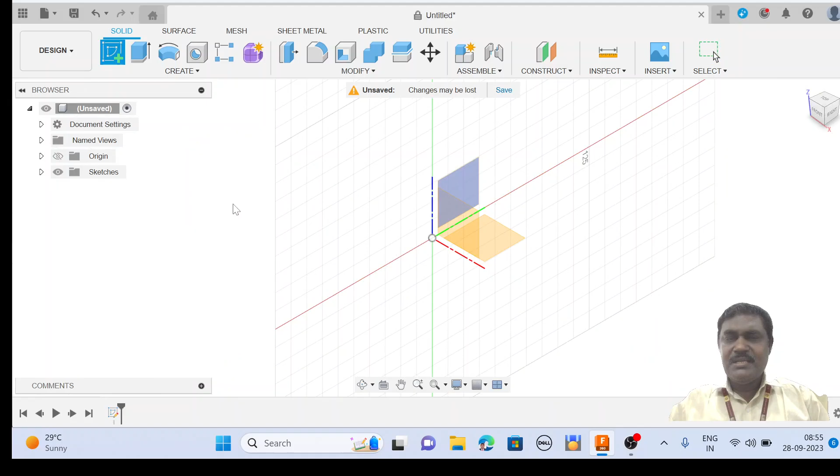Now you can see that this is the sketch plane. Click this one. Once clicked here, three reference planes are visible. You can select any one reference plane. Now I have taken this plane as a reference plane.

Now here there are separate different icons, and you can also control the different activities here, such as the line type, whether it is a construction line or a center line, and look at sketch, grid, snap mode, slice mode, profile mode, points, dimensions, constraints - different options are there. If you want, you can use it, or just click this one and it will go inside.

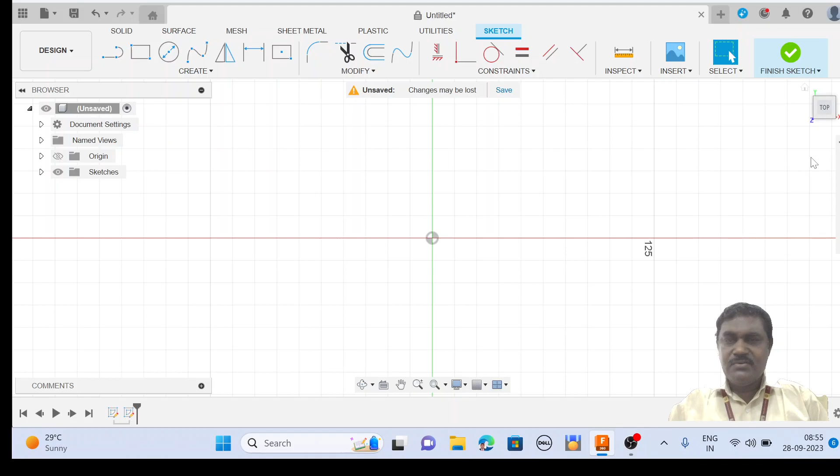Now let us see that. First I want to draw the line, simple. Using this icon you are able to draw lines and arcs continuously. So now click this icon.

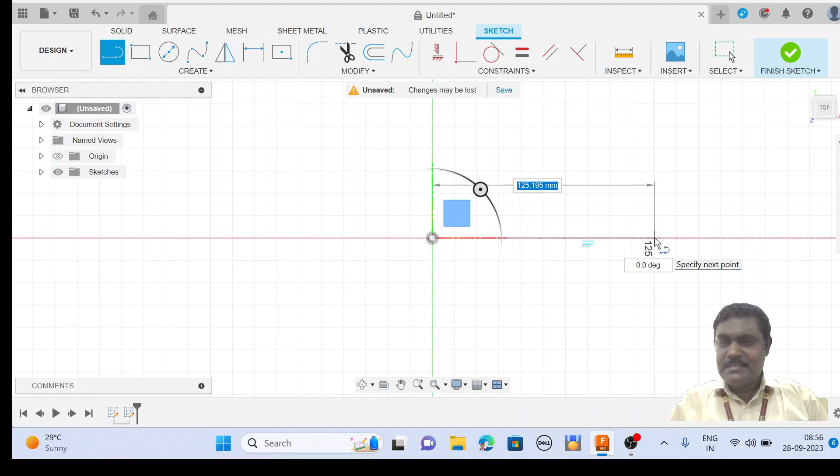Now I want to draw this one line and go to the second point. Now I can click the second point, then see the third point. Here this is continuation lines, it will come like this.

Okay, now next I want to draw the arc. For drawing the arc, just press the mouse and drag, so that the second point will be here, creating the arc. After completion, right click the mouse, then you can click here - different options are there. Now click OK, then the sketch is obtained.

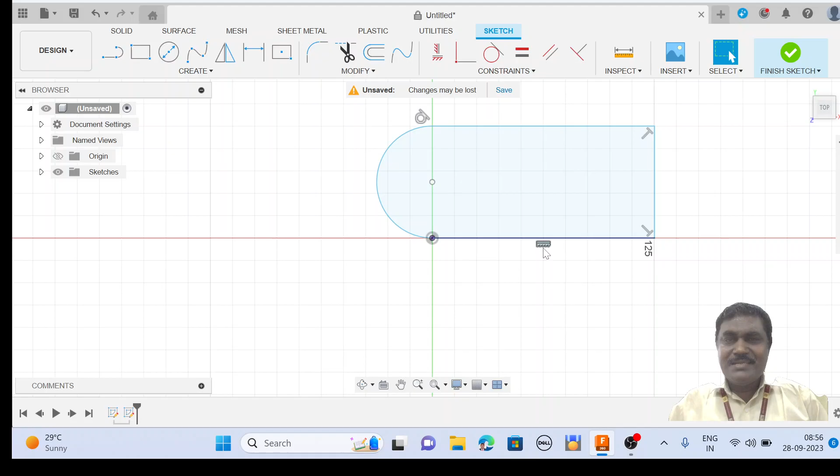So these are the constraints. Now here see that this is the tangent, this is the horizontal constraint, and this is perpendicular. These perpendicular symbols are visible. If you don't want the symbols, just click here, and the constraints are there - you can just uncheck the constraints. All the symbols disappear from the sketch for clearly understanding.

Okay, so this is for using the polyline. You are able to draw the line and arc.

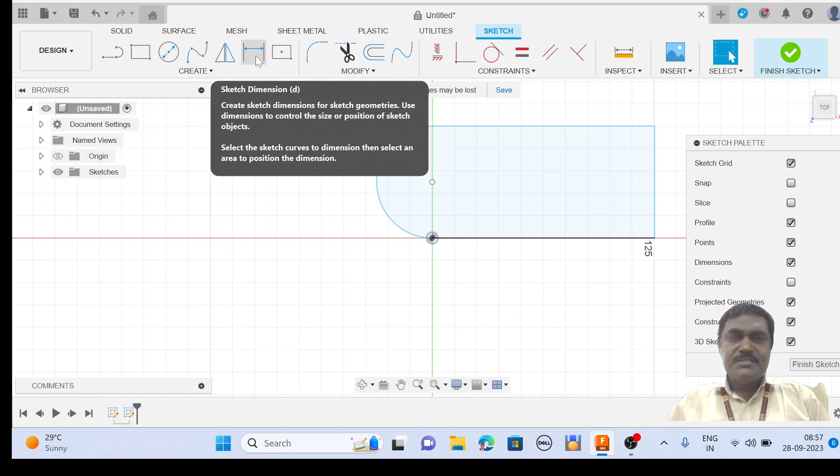Okay, now how to mark the dimensions? Using the sketch dimensions, you can create these drawings. Just select this one and click here, and you can mark the dimension. Suppose 125.19 is there, I want to make it round figure 130. Now you can click 130 and enter, so it will take 130 dimensions.

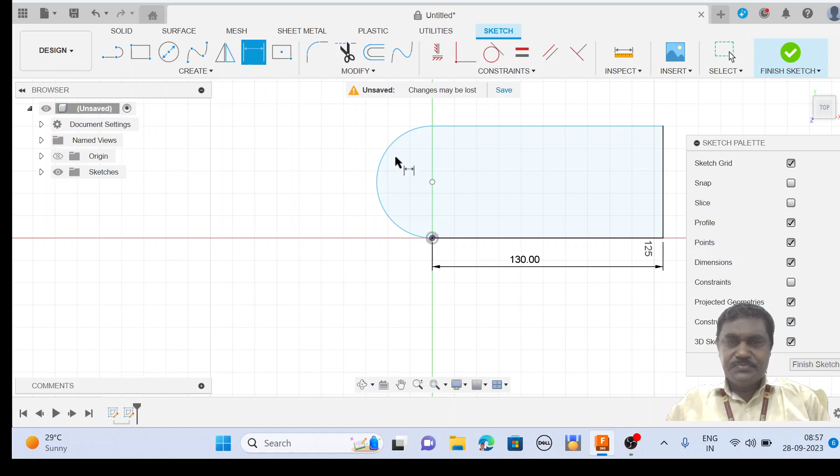Similarly for this arc, if you want, you can see the radius, where you want you can place the radius, and round 31.29 is there. I want to make it 30, then enter. So accordingly it will readjust the dimensions. Likewise you are able to create the dimensions also.

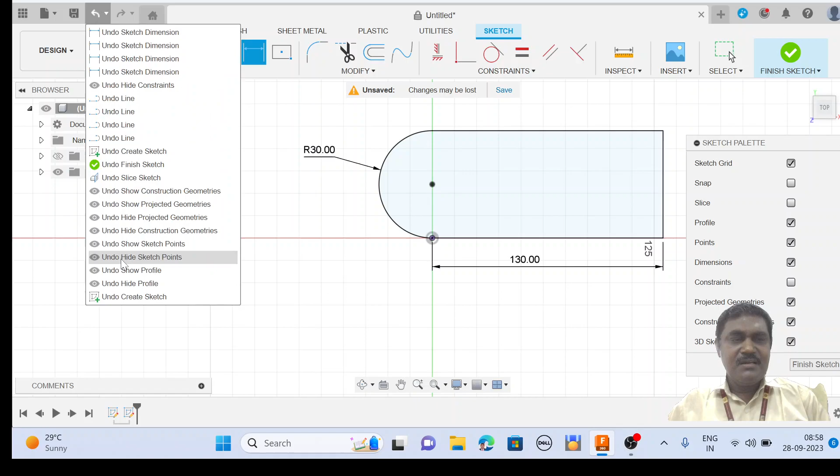Okay, so this is for creating this polyline. Now I want to delete this one. Just go for this undo, sketch dimensions are there, or inside here so many are there, one after the other. What you have to do is click here, or you can click this one after the other, it will be removed, deleted. One by one it will be deleted.

Okay, now again you can enter the sketch mode. Then I want to draw the rectangle - the 2-point rectangle. Create a rectangle using the 2 points for the diagonal corners. Select the first point as the start of the rectangle and select the second point, or specify the width and height values. These options are possible for creating the rectangle.

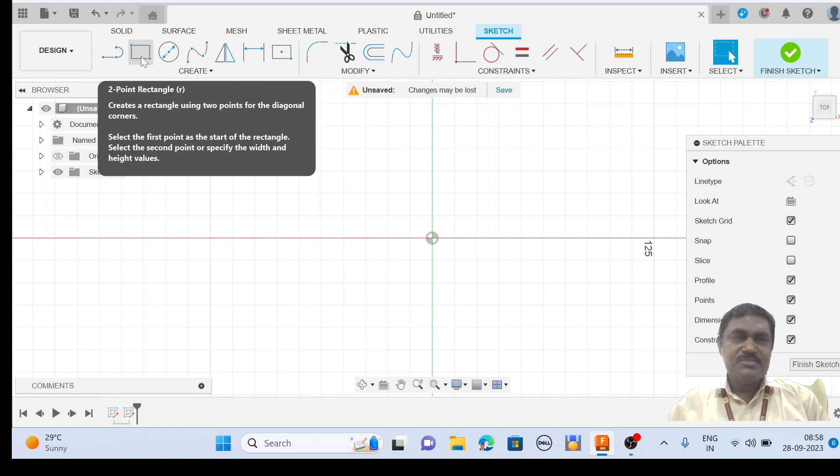Now I click here - this is the starting point. Now you can see the diagonal point. You have to create the other one. Then right click and click OK.

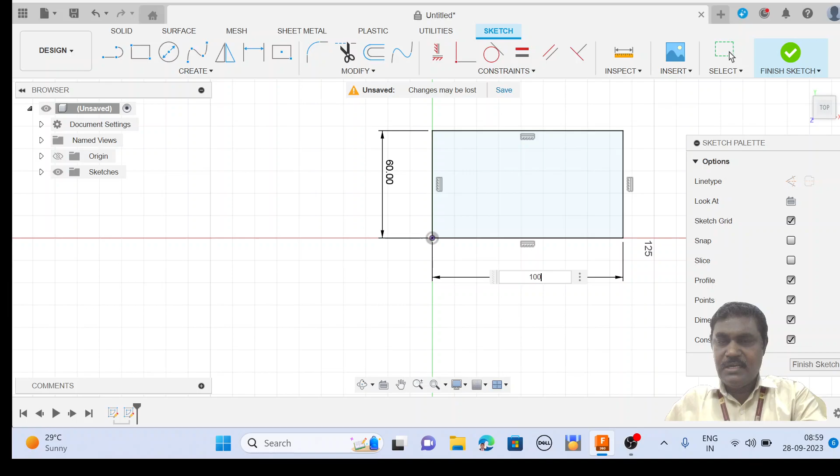Okay, now if you want to change the dimensions, you can change by using this dimension tab. Click the dimensions tab, then select this one, and you can see 58 point is there. Now I round it to 60, then enter, it will move. Similarly for this also, 107 is there, I want only 100, just click and enter, so it will be adjusted. Okay, so this is for the diagonal points.

Here you can see another option, center point rectangle. Click this one. Now this is the center point, and you can extend wherever you want the rectangle. You can create, right click, click OK. So in these two ways you can create rectangles.

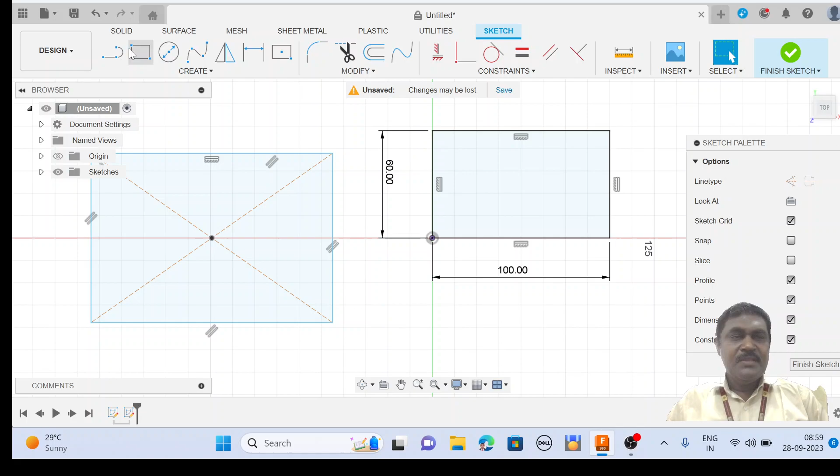Okay, now I want to undo. Just undoing all the activities. Then I will go for another drawing. Now let's select this plane.

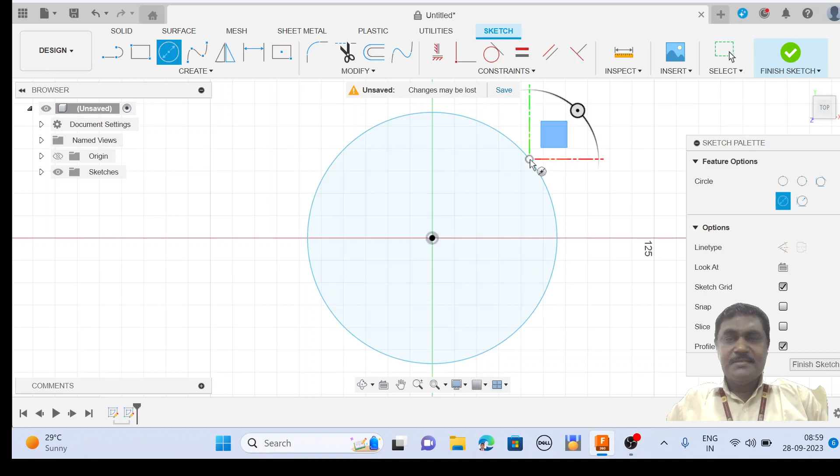Now I want to create the circle. Creating the circle using the center point and diameter, just click the circle. I make this the center point and enter the radius or diameter, right click OK. So this circle will be created.

Okay, similarly now you can create this - this is for the spline. You click this point, and like several points you can select like this to draw the splines, then right click and click OK. That will be over, so now you are able to control this curve.

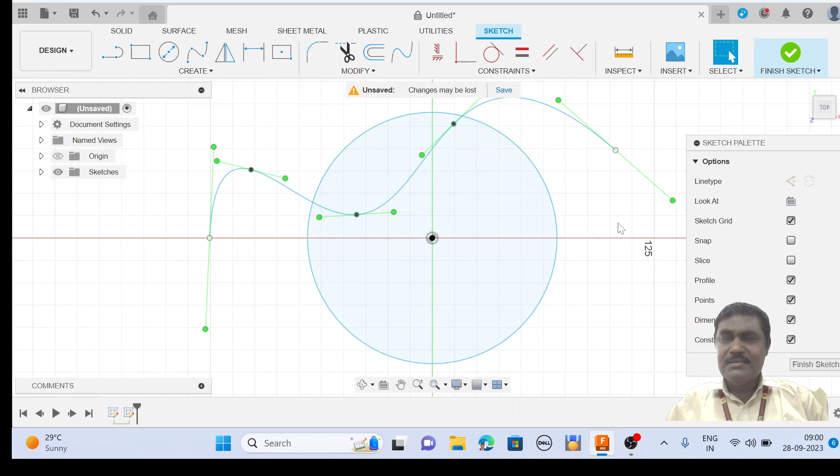You can see that here this line you can move according to the required shape. You can move this tangent line and readjust the shape. Now you can see you can move like this to readjust the shape - that possibility is there. Okay, next coming to the mirror line.

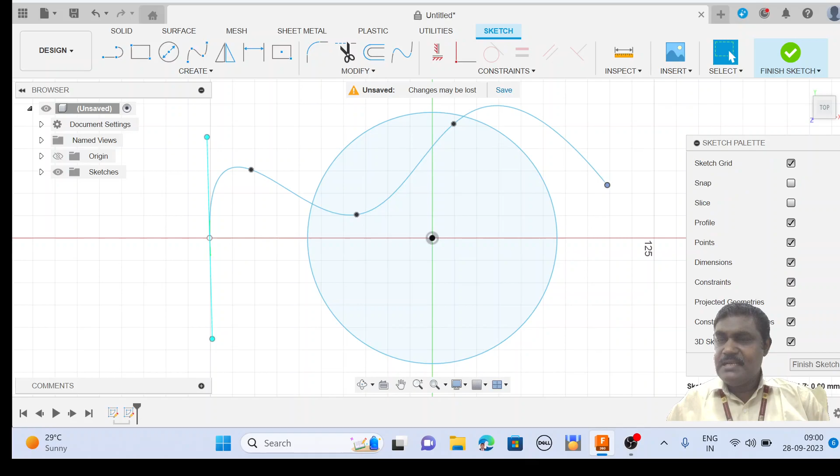Okay, so now I want to make this spline on mirror. But before constructing the mirror, we want to draw the construction line. Just go here for the construction lines. Now you can see the construction line's line type.

Now I am selecting the construction line, click line, then construction. Now I've drawn one line here. Now, drawn one construction line, then click OK.

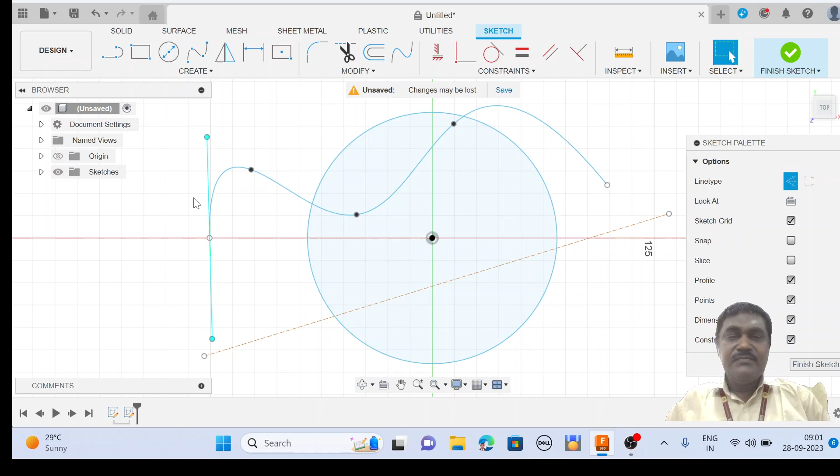Now I want to make a mirror of this spline. Go to this mirror image icon, and it asks which object you want to mirror. First you select, click here, and select this spline. Now you can see one is selected, then select the mirror line here, and this is my mirror line. Then click OK. So now after this mirror line, this entire spline is obtained.

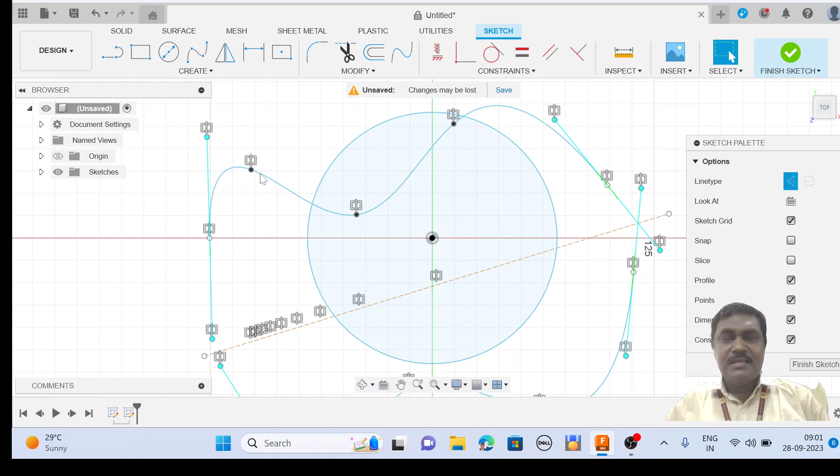If you want to see fit for screen, you can see that. Now I want to remove all the constraints so it's clearly understandable. Now see that I removed the constraints. So likewise, you can create mirror images using this mirror icon, and this is already explained in sketch dimensions.

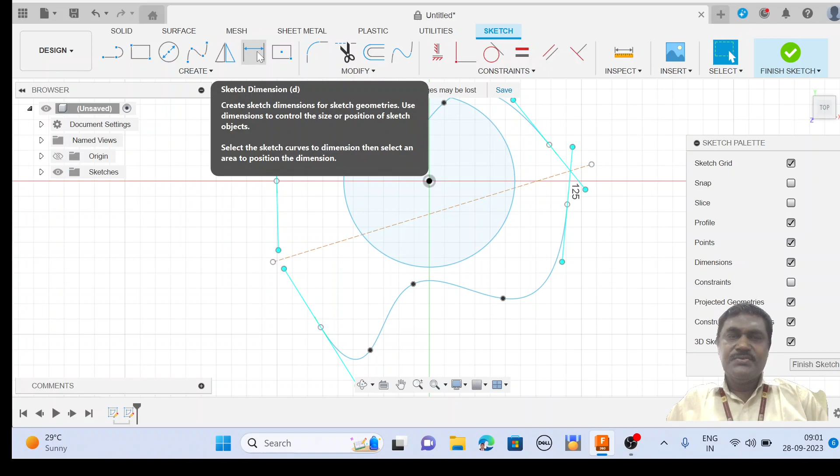So now here are some more options. Click the create button - line, rectangle, circle are already done. Now we want to see arc and polygon, all these things one by one. Let us see that. Now undo this, I want to remove these things. Now we can create one by one.

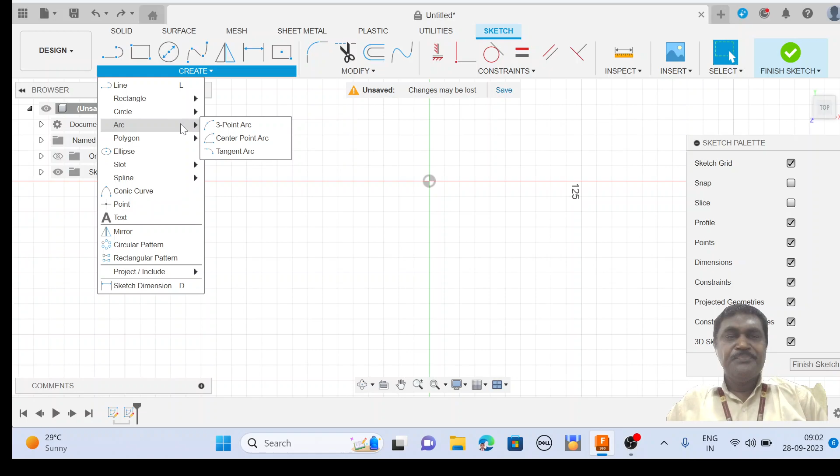Already this arc - here arc also has three options: the 3-point arc, center point arc, and tangent arc. Now let us see the 3-point arc. This is the first point, second point, third point.

Then click OK. Now you can see this line already has the construction line type - you have to change this line type. Then it will come to the next line. That is arc 3-point.

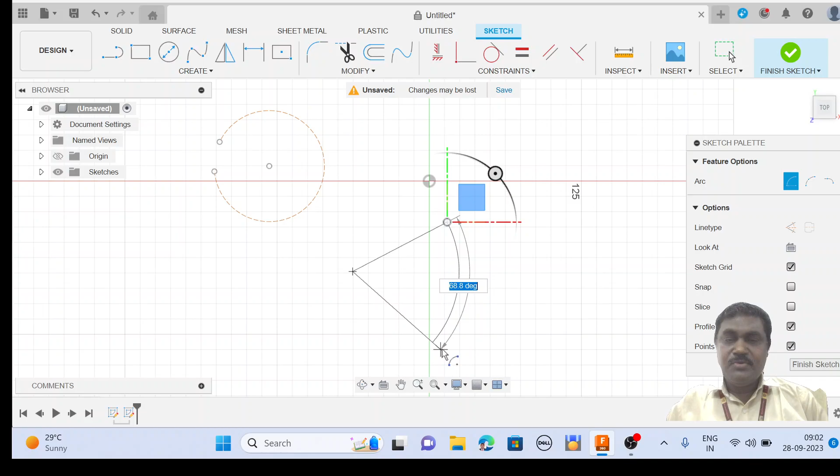Now center point arc. Okay, center point, and you can create the arc. You see the center point, starting point, and ending point. You can click OK. So this is the arc.

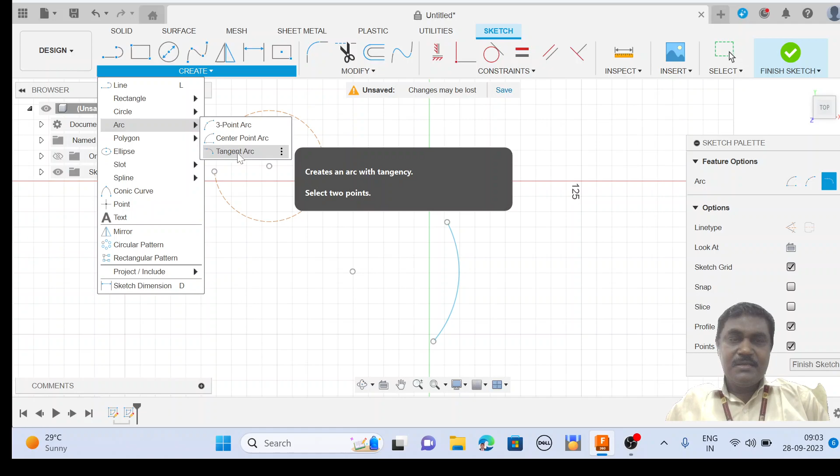So in the arc mode, there are three types, and any type you can use. In the tangent arc, click this starting point. Now you can see the arc using the tangent point - tangent arc. So this point already exists. From this you have to make a tangent arc like this.

So from an existing arc you can create another arc tangent to the previous one. You are able to create this using this option. Okay, next coming to the polygon.

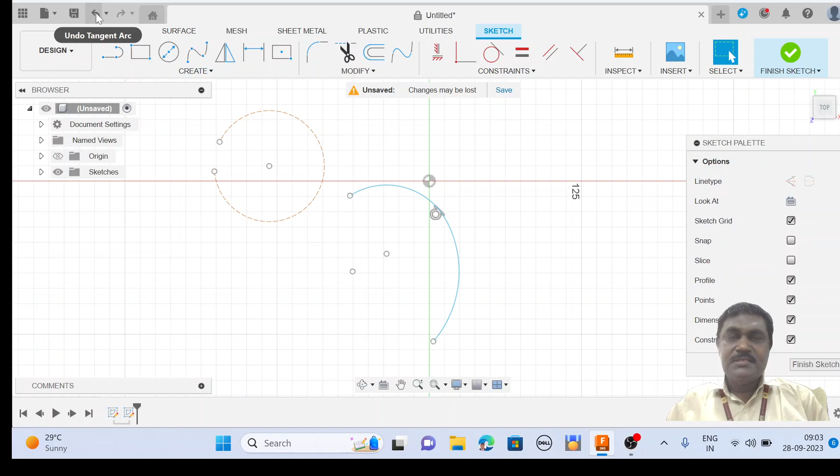Now let me first undo these things, then go for the polygon. So the polygon has circumscribed polygon, inscribed polygon, and edge polygon - these are the three options available. So any one option you can create.

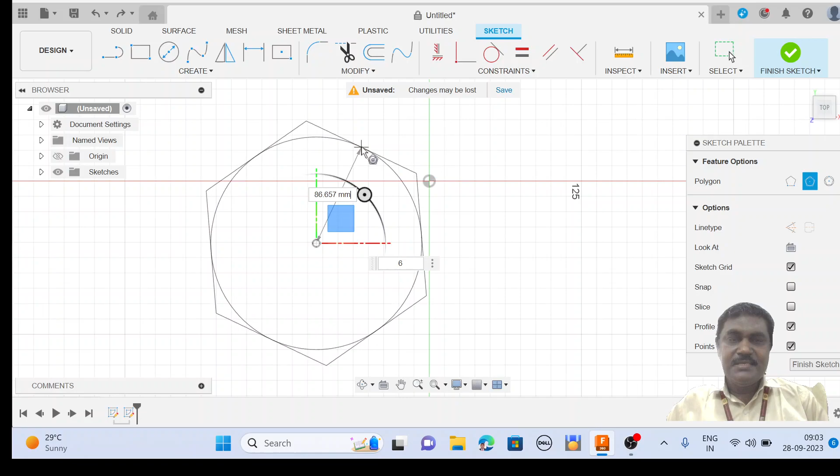So circumscribed polygon means the circle should be drawn inside. You can see the circle is inside. You can draw this.

Now you can see another type of polygon, the inscribed polygon. So for inscribed polygon, you can see the circle is outside. That is the difference between these two.

And another polygon is edge polygon. Now you can create one edge here and create another edge. Now you can see that this is the edge polygon. So these are the three options available - whichever option you want, you can use it to create the polygon.

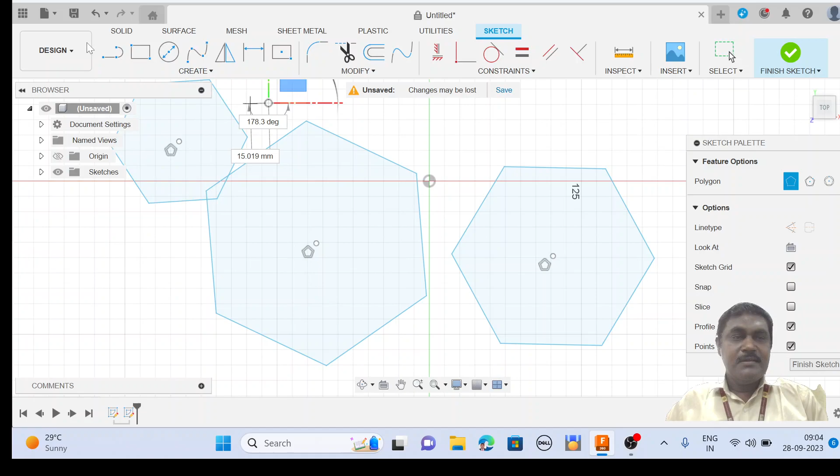Okay, now I want to undo, I want to remove these things. Next, the polygon is over. Next is ellipse - you want to draw the ellipse.

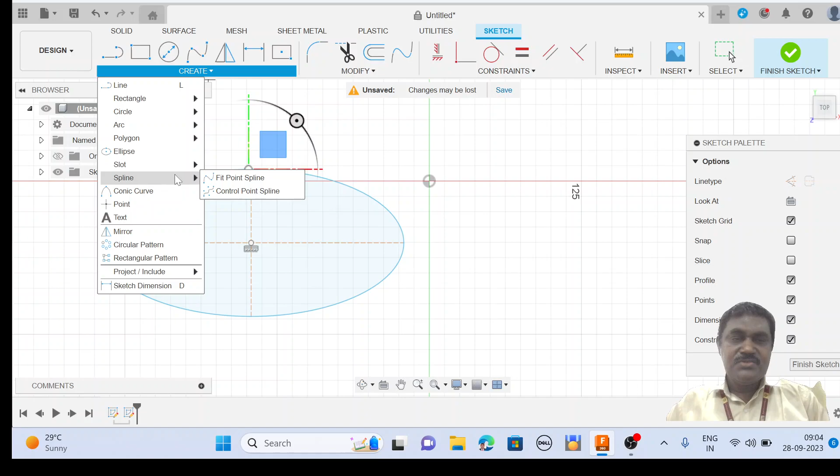First you select the center of the ellipse, and the major axis and minor axis - the ellipse will be created. The slot is not required here. The spline also, like B-spline, conic. So that point, if you want to write a point, you can create the point. So that point will be created.

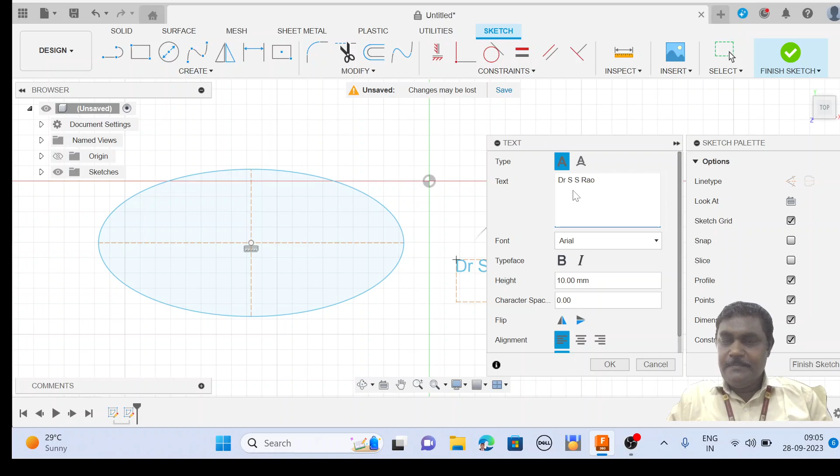Now I want to draw the text. Now you can click this text and just write down the name wherever you want. So now I want to write down my name, Dr. S.S. Rao. Then click OK. So now this SS Rao name will be there.

So this is the construction line - if you don't want it, you can remove these construction lines. That will be removed. Now likewise you can create text also - so whenever you're drawing a rectangle or triangle and want to name them, using this way you can create the text.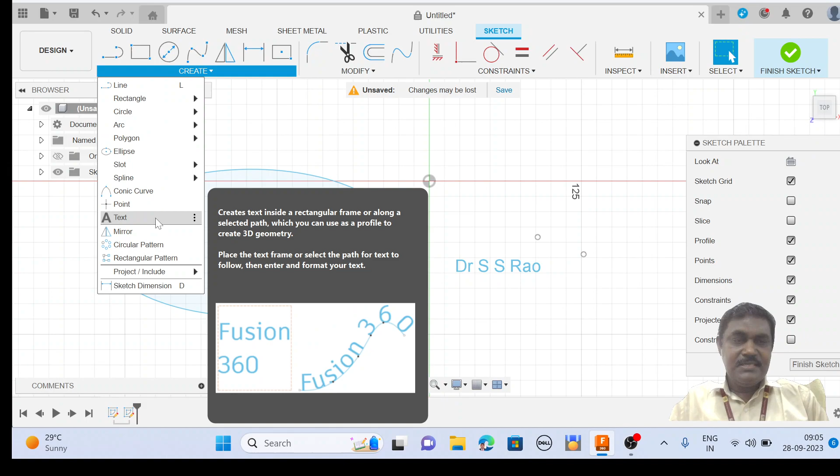So mirror is already done, and the remaining patterns - circular pattern, rectangular pattern, and projection - all these things I want to explain in the next video. I hope everyone understands. This is the preliminary sketch mode used to draw different two-dimensional sketches.

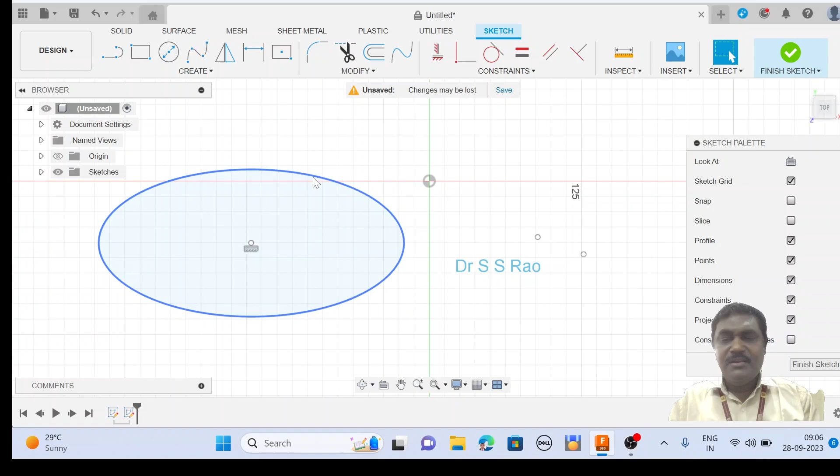Once you have obtained the two-dimensional sketches, then you can go for the 3D diagrams. You simply exit from the sketch mode and enter into 3D mode. That will be explained in detail in the coming videos. I hope everyone understands what I explained using these two-dimensional sketch icons. Thank you.